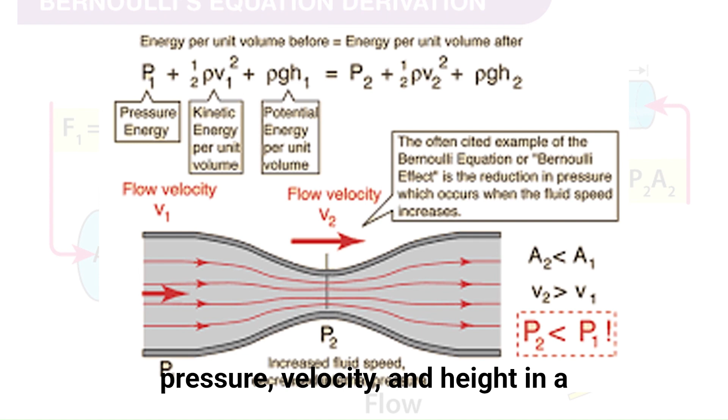One of the fundamental principles governing fluid flow is Bernoulli's theorem, which establishes a relationship between pressure, velocity, and height in a moving fluid. This principle plays a crucial role in various real-world applications, from aviation to medical science.

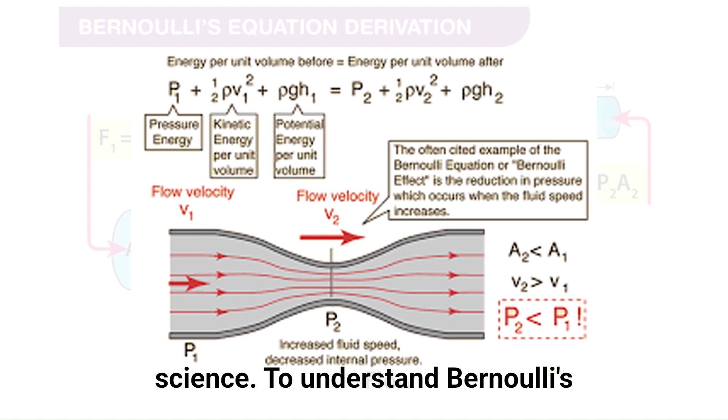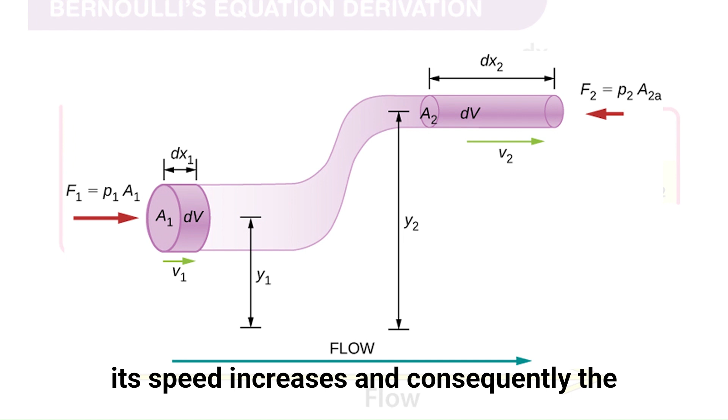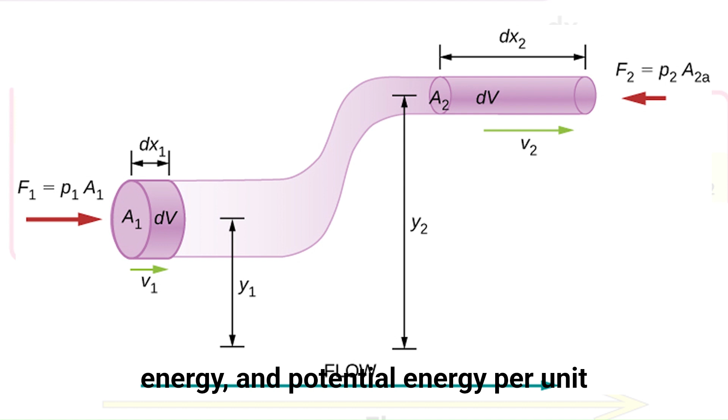To understand Bernoulli's theorem, imagine a fluid moving through a pipe with varying diameters. As the fluid moves through a narrow section, its speed increases, and consequently the pressure decreases. This relationship, derived from the conservation of energy, states that the sum of pressure energy, kinetic energy, and potential energy per unit volume remains constant along a streamline. Essentially, where a fluid moves faster the pressure is lower, and where it moves slower the pressure is higher.

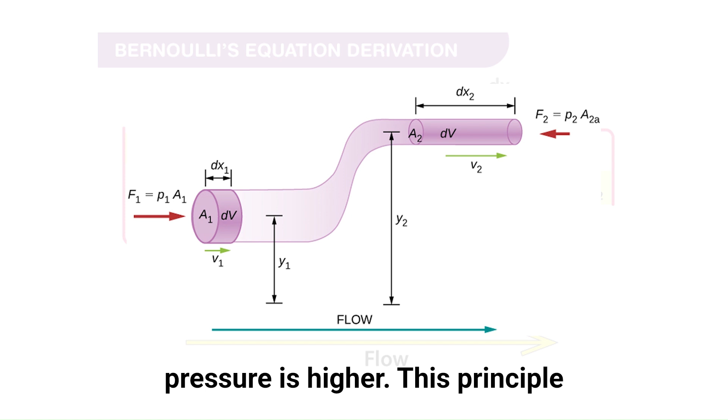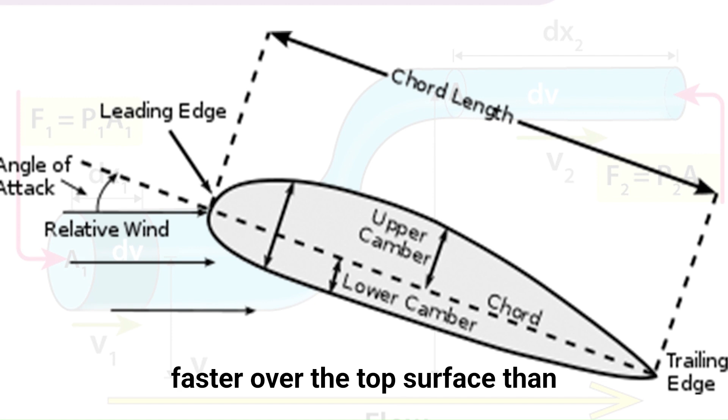This principle explains why airplanes generate lift. The shape of an airplane wing, or airfoil, is designed so that air moves faster over the top surface than underneath. Due to Bernoulli's theorem, the pressure above the wing is lower than below, creating an upward force that allows the plane to lift off the ground.

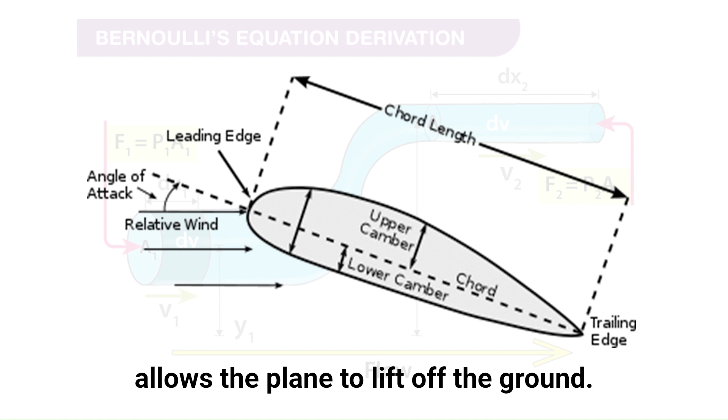The same concept is applied in the working of carburetors, atomizers, and even in the human circulatory system, where blood flow is influenced by pressure variations.

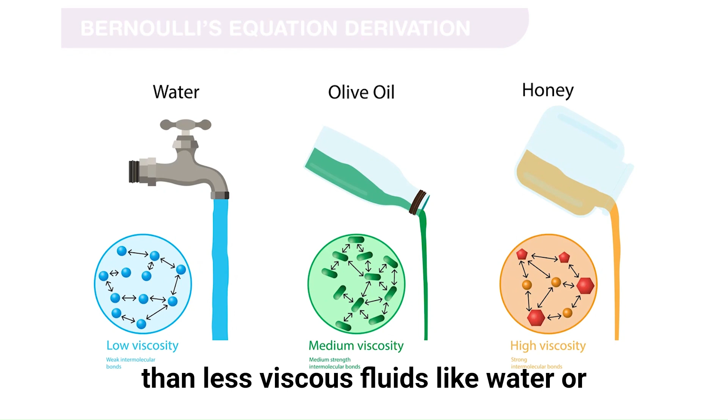While Bernoulli's principle is useful in understanding ideal fluid behavior, real-world fluids also experience resistance to motion. This resistance is due to viscosity, which is a measure of a fluid's internal friction. Highly viscous fluids, like honey or oil, flow much slower than less viscous fluids, like water or air.

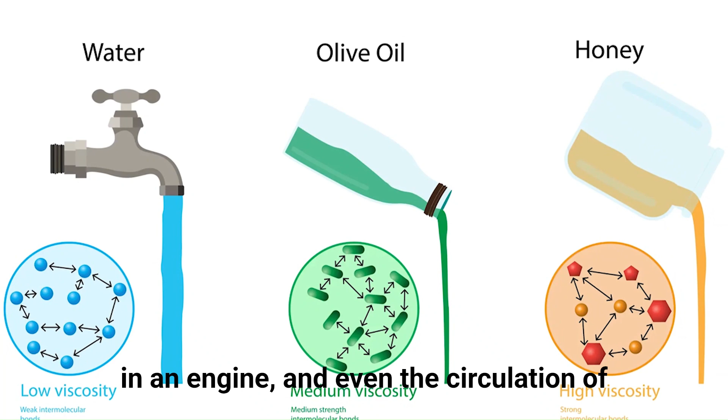Viscosity plays a crucial role in determining the flow rate of a fluid through a pipe, the movement of oil in an engine, and even the circulation of blood in our bodies. Viscosity depends on the cohesive forces between fluid molecules.

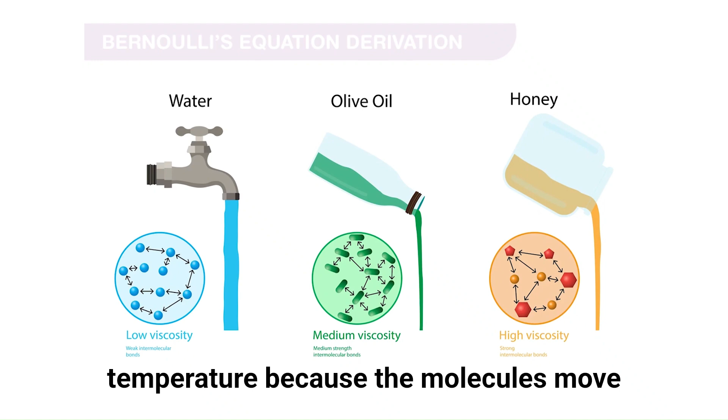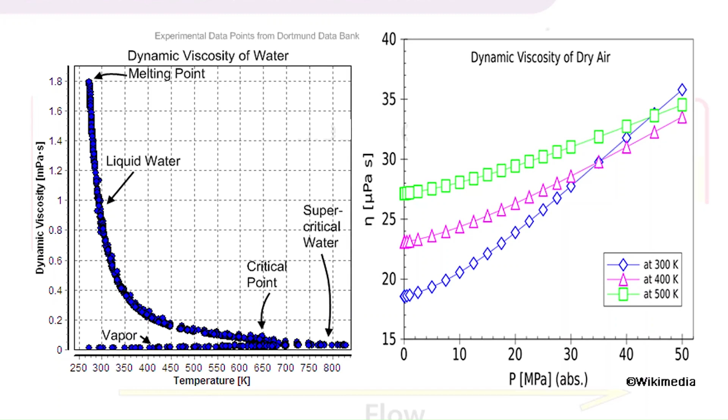In liquids, viscosity decreases with increasing temperature because the molecules move more freely. In gases, however, viscosity increases with temperature, as higher energy levels lead to more frequent collisions. Understanding viscosity helps engineers design efficient lubrication systems, improve medical treatments, and develop better industrial processes.

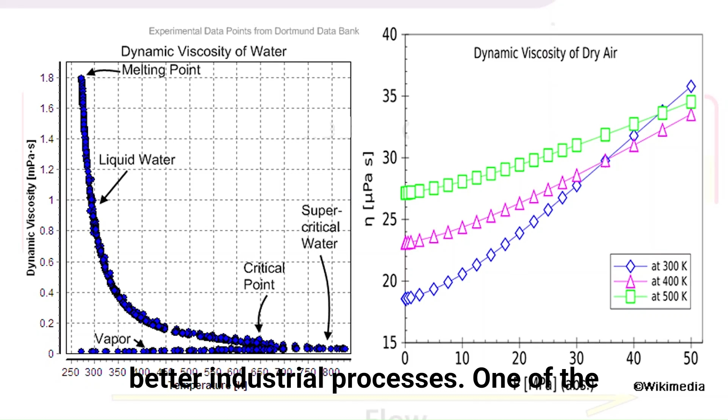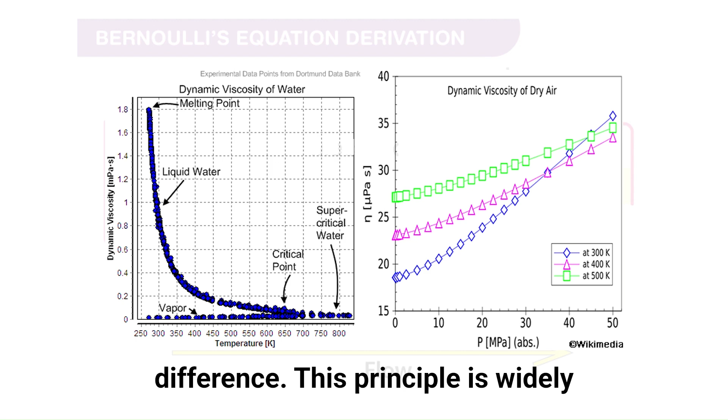One of the important observations related to viscosity is Poiseuille's law, which describes how the flow rate of a viscous fluid through a tube depends on the tube's radius and the applied pressure difference. This principle is widely applied in medical sciences, especially in understanding blood flow through arteries and veins.

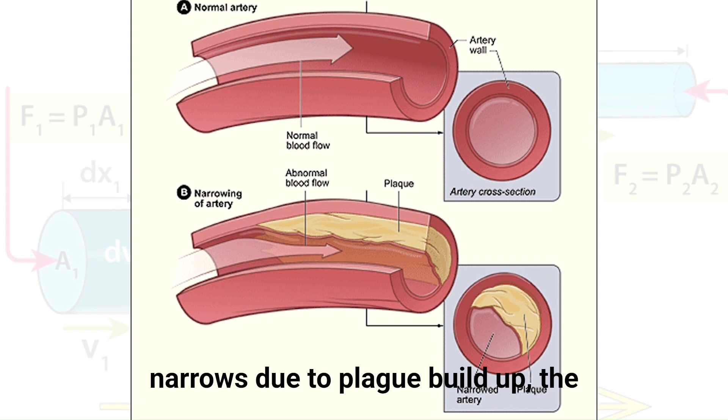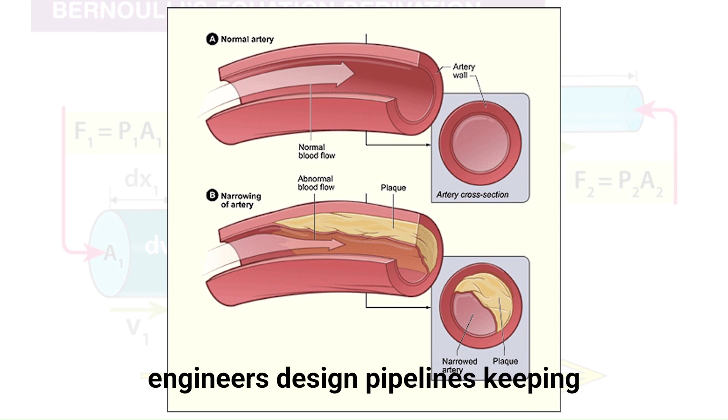If an artery narrows due to plaque buildup, the resistance to blood flow increases, affecting circulation and leading to potential health issues. Similarly, in industrial applications, engineers design pipelines keeping viscosity in mind to ensure smooth and efficient transport of liquids.

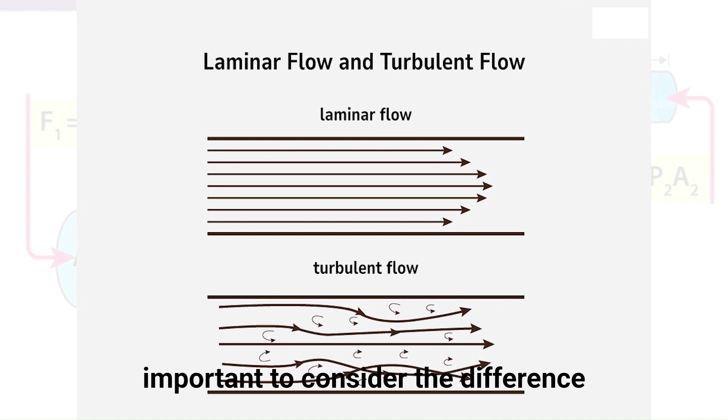When discussing fluid mechanics, it's also important to consider the difference between laminar and turbulent flow. In laminar flow, fluid moves in smooth layers without disruption, while in turbulent flow, chaotic eddies and vortices form.

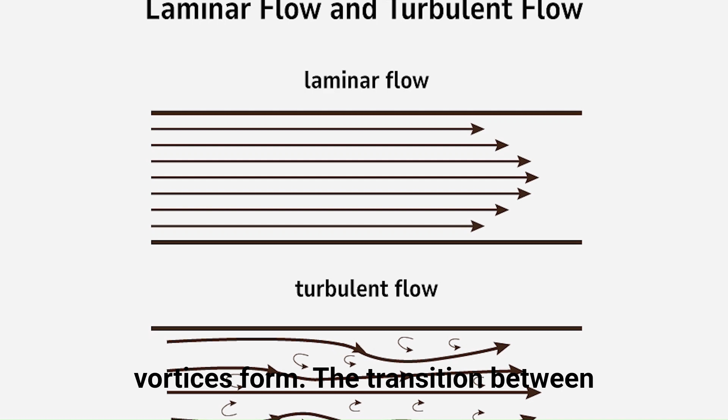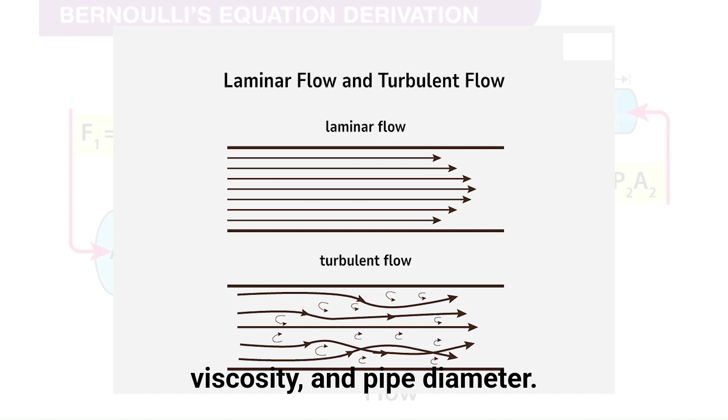The transition between these two types of flow is determined by the Reynolds number, a dimensionless quantity that depends on fluid velocity, viscosity, and pipe diameter. Understanding this concept helps scientists and engineers optimize designs for vehicles, aircraft, and even water supply systems.

In the field of medicine, the principles of fluid mechanics and viscosity are applied in designing medical devices such as syringes, IV drips, and respiratory support systems. For instance, the correct selection of fluid viscosity ensures that medicines are administered at the right flow rate.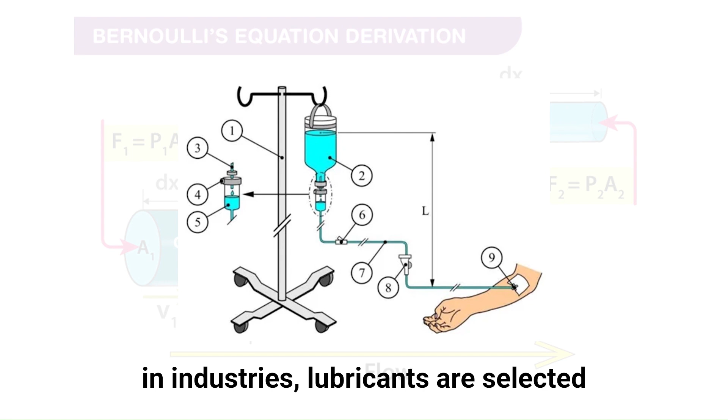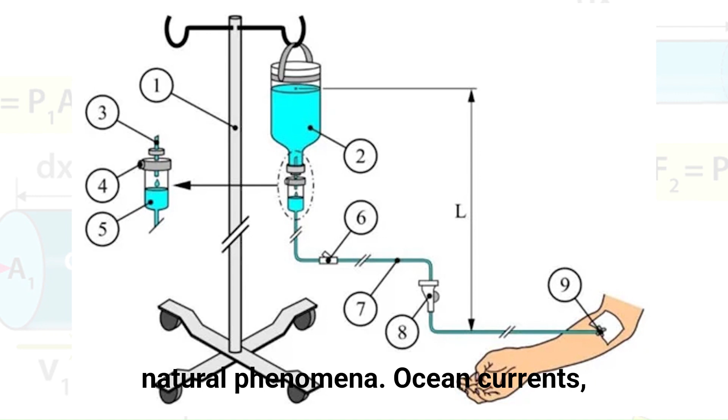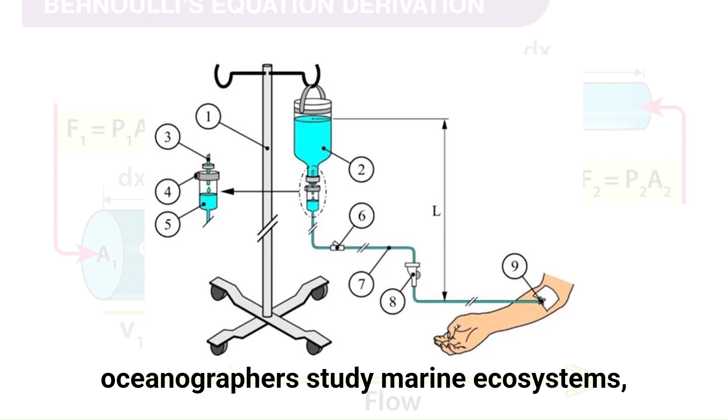Similarly, in industries, lubricants are selected based on their viscosity to reduce friction and wear in machinery. Fluid mechanics also plays a key role in natural phenomena. Ocean currents, wind patterns, and even the weather system are influenced by the movement of fluids. Understanding these processes helps meteorologists predict storms, oceanographers study marine ecosystems, and engineers develop better water management systems.

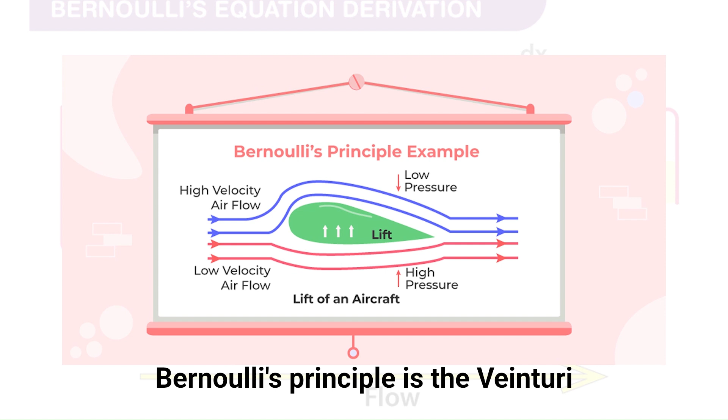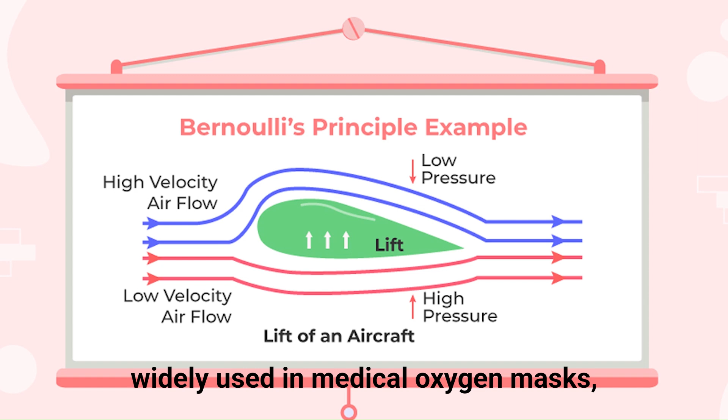One fascinating phenomenon observed due to Bernoulli's principle is the Venturi effect, which describes how a fluid's velocity increases and pressure decreases when passing through a constricted section of a pipe. This principle is widely used in medical oxygen masks, where a high-speed stream of oxygen draws in ambient air, providing an effective oxygen supply to patients.

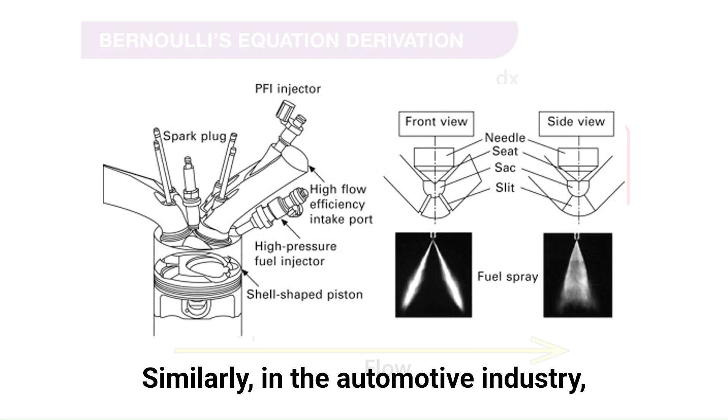Similarly, in the automotive industry, fuel injectors operate on the same principle. By creating a pressure difference, they efficiently mix fuel with air for combustion, improving engine performance and fuel efficiency.

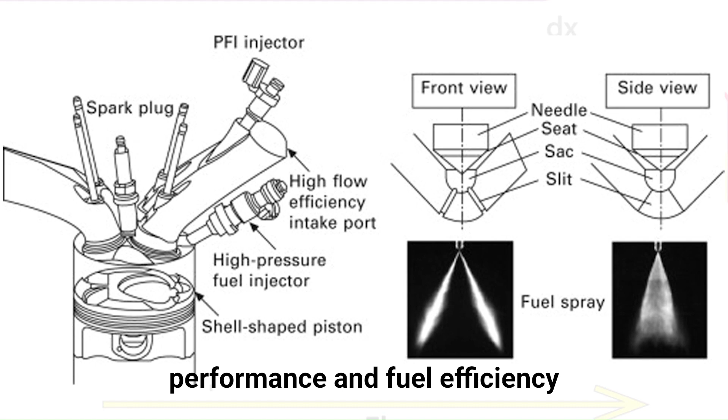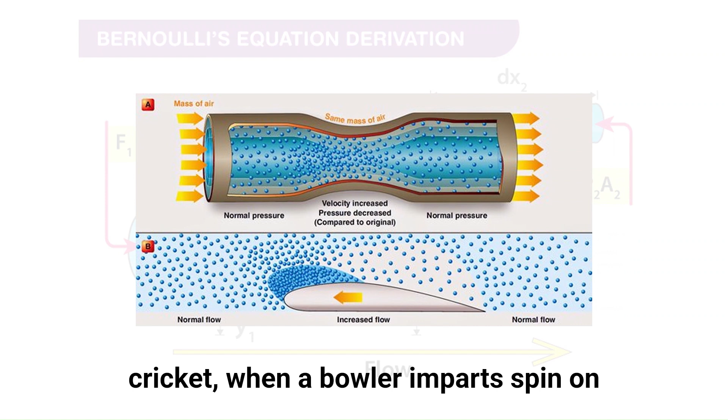In everyday life, we also see the applications of Bernoulli's principle in sports. For example, in cricket, when a bowler imparts spin on the ball, the variation in airflow speed on either side creates a pressure difference, causing the ball to swing in midair.

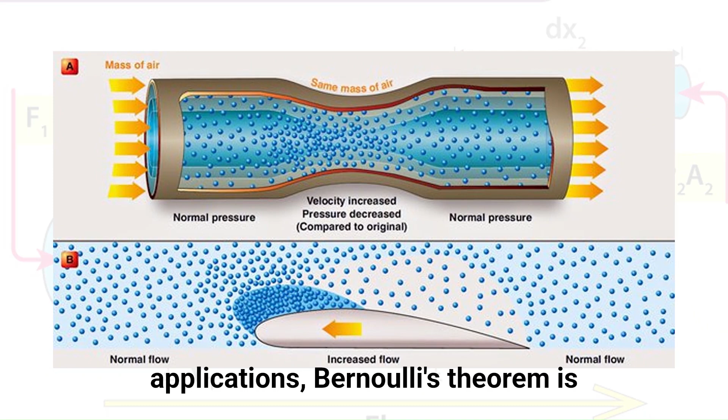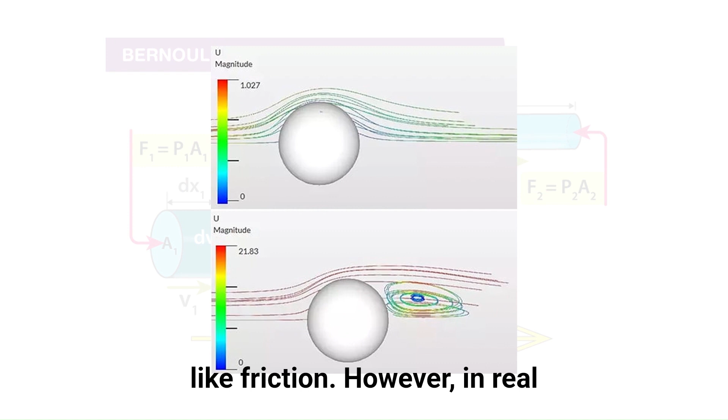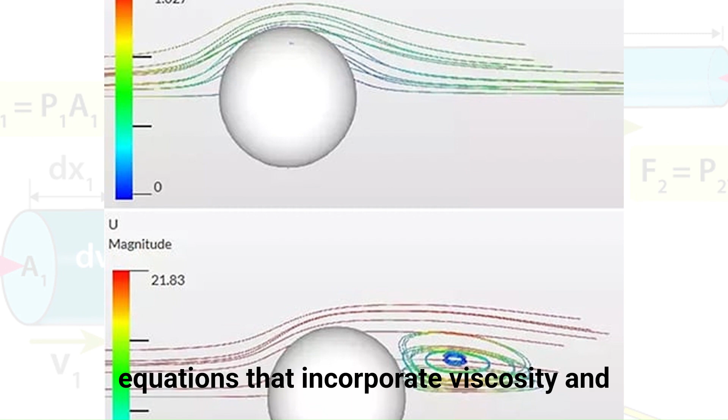Despite its widespread applications, Bernoulli's theorem is based on the assumption of an ideal fluid, meaning it does not account for viscosity, turbulence, or external forces like friction. However, in real-world scenarios, fluid flow is often influenced by these factors. That's why engineers and scientists use modified equations that incorporate viscosity and turbulence to achieve more accurate predictions and designs.

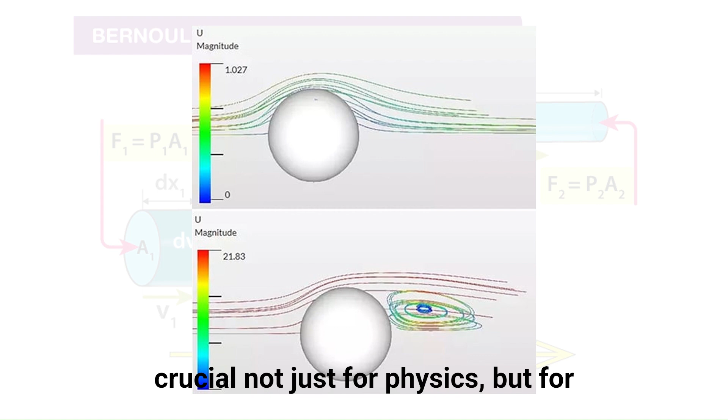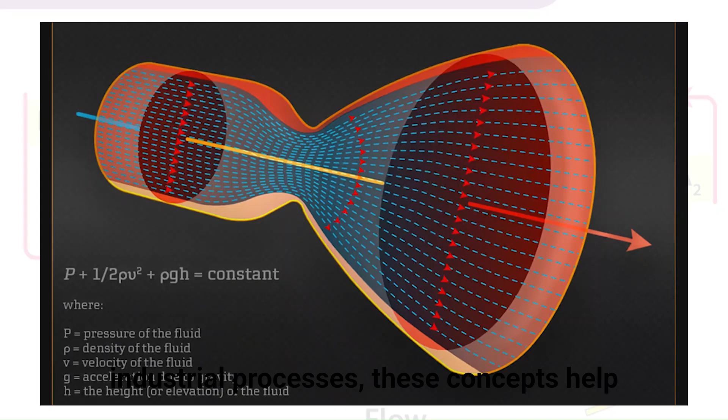Understanding the principles of Bernoulli's theorem and viscosity is crucial not just for physics but for various fields of science and engineering. From designing airplanes to improving medical treatments, from predicting weather patterns to optimizing industrial processes, these concepts help shape the world around us.

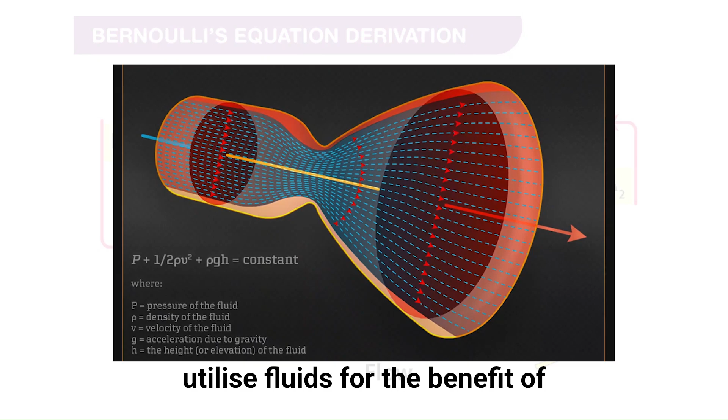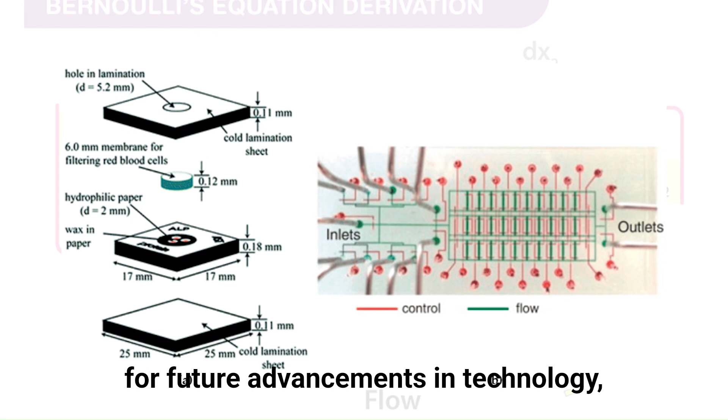As we continue to explore fluid mechanics, new innovations and discoveries will further enhance our ability to manipulate and utilize fluids for the benefit of society. By mastering these concepts, students can gain a deeper appreciation of the fundamental forces governing fluid behavior, paving the way for future advancements in technology, medicine, and environmental science.

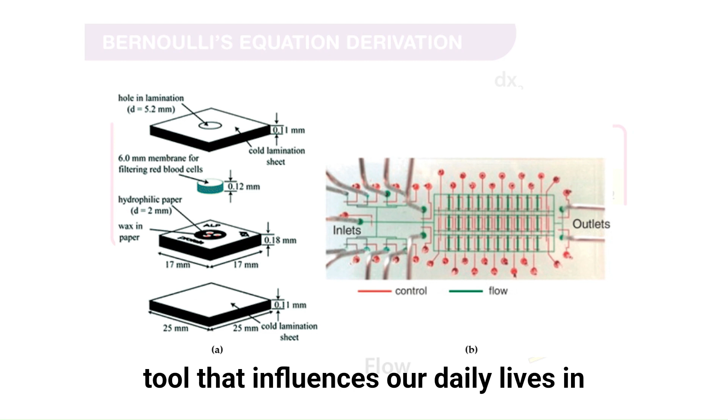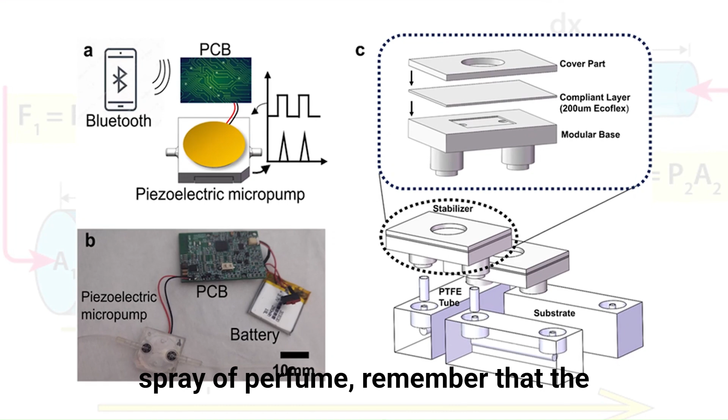The study of fluid mechanics is not just a theoretical subject, it is a practical tool that influences our daily lives in ways we may not even realize. So the next time you see an airplane taking off, a river flowing, or even a simple spray of perfume, remember that the principles of Bernoulli and viscosity are at play, shaping the world in dynamic and fascinating ways.